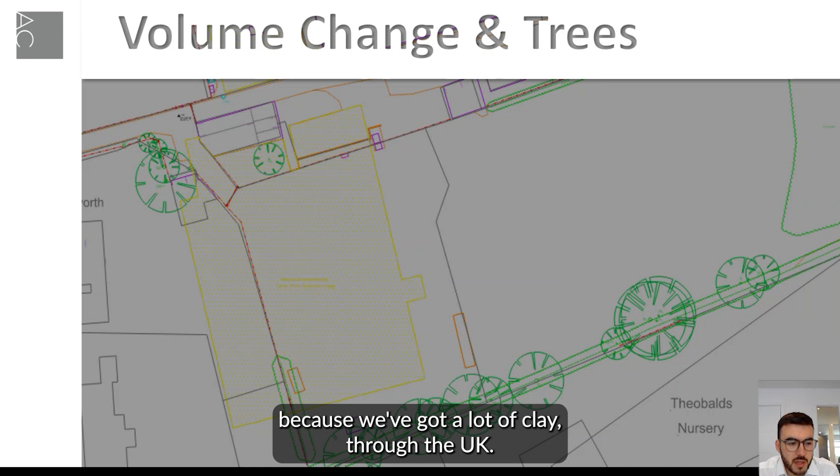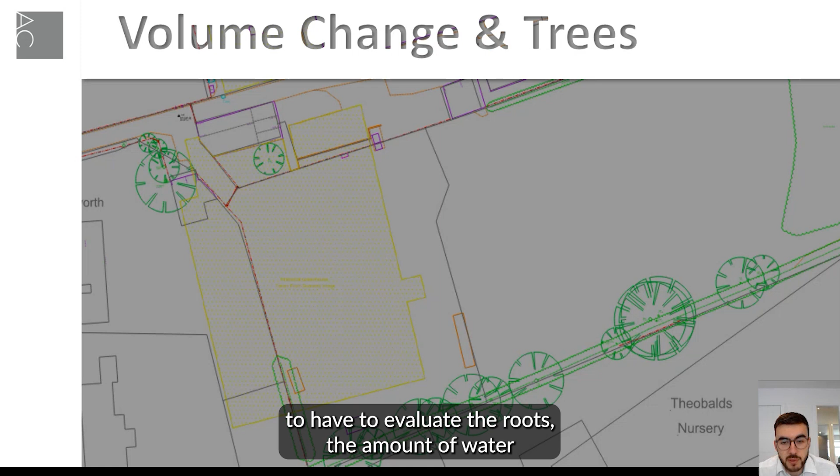Volume change in trees is probably the most common issue because we've got a lot of clay through the UK. Clays can vary in their volume change potential, but quite often if they're high, you're going to have to evaluate the roots, the amount of water near your site, and the potential for change in settlement. This is when you start to see cracking at lintels over time if you get this wrong.

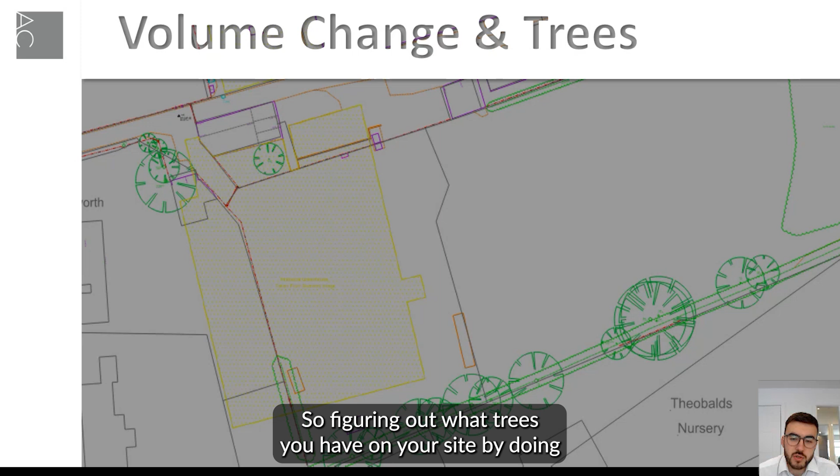Figuring out what trees you have on your site by doing topographical surveys first, getting the lay of the land, followed by tree surveys, will give you an idea of what you've got and how far away you want to be. If you've not set out your site and you have quite a lot of land to work with, we can advise you as to how far away you might want to be from a certain tree to avoid its influence.

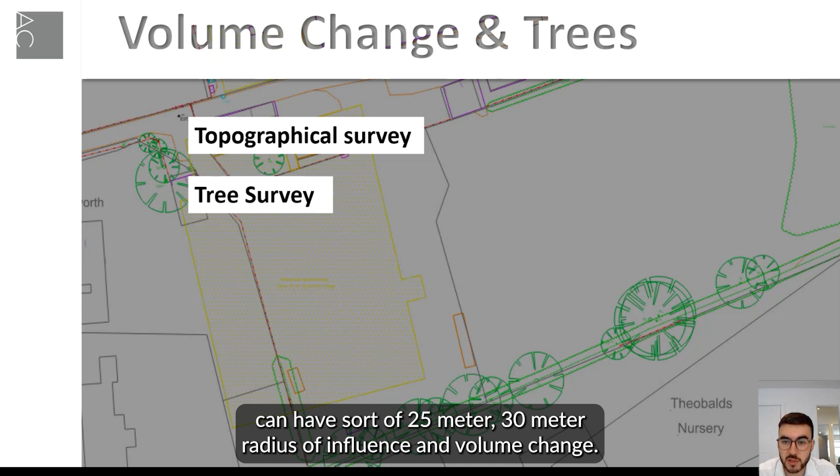They do range quite far. Some big trees can have a 25 to 30 metre radius of influence on volume change.

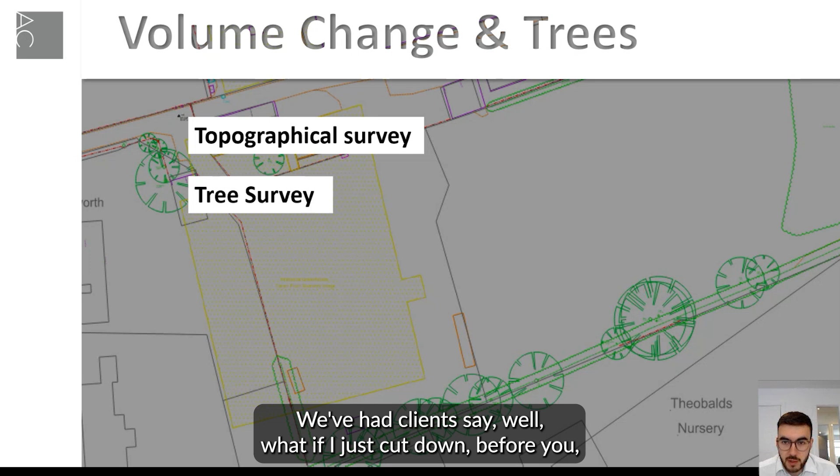These are not something you can skip around. We've had clients say, well, what if I just cut it down before you start works? Well, the roots can take up to 10 years to die off. So if you chop it down thinking you're saving yourself the hassle before getting us involved, I'd advise against that, because over the course of 5 to 10 years, you might find that it settles and cracks after that.

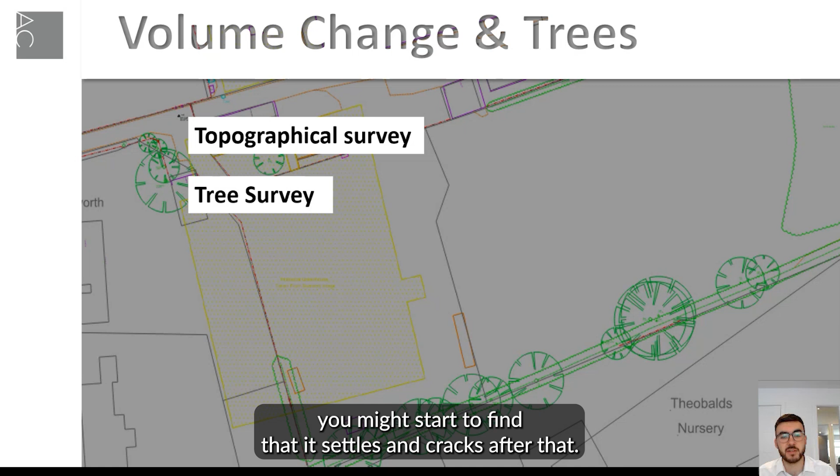So, site planning: figure out where your trees are and what you've got. If you've got big ones, whether you chop them down or not, they're still going to have an influence, that's fine, but you can plan ahead for it. You can say, okay, here are the options for the foundations we're going to go with.

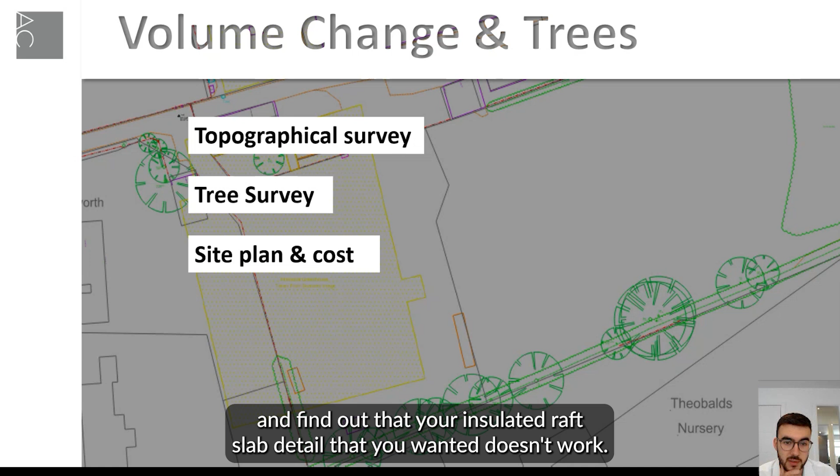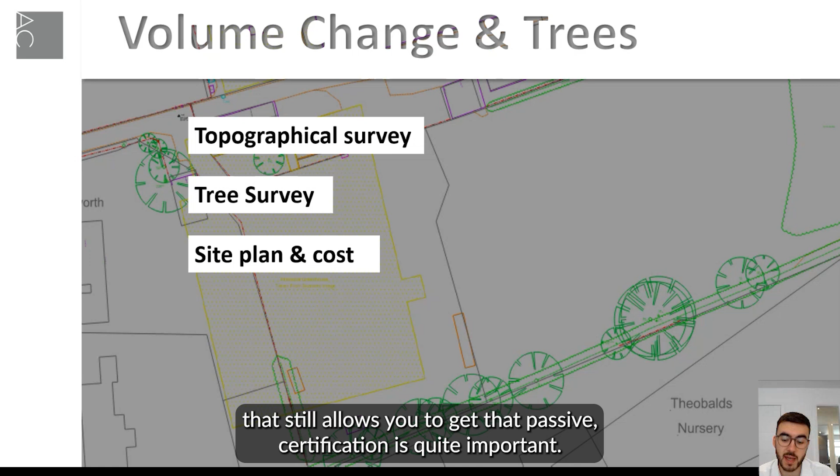If you're trying to go down the route of, say, a passive house or a passive principle designed house, this is important, because you don't want to leave this to the later end and find out that your insulated raft slab detail doesn't work. That could blow your passive certification out of the water straight away. So planning for that and setting it out on site in a way that still allows you to get that passive certification is quite important.

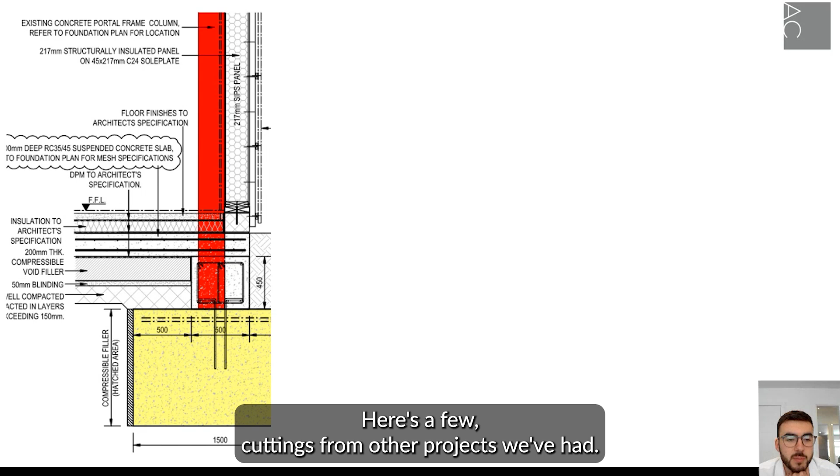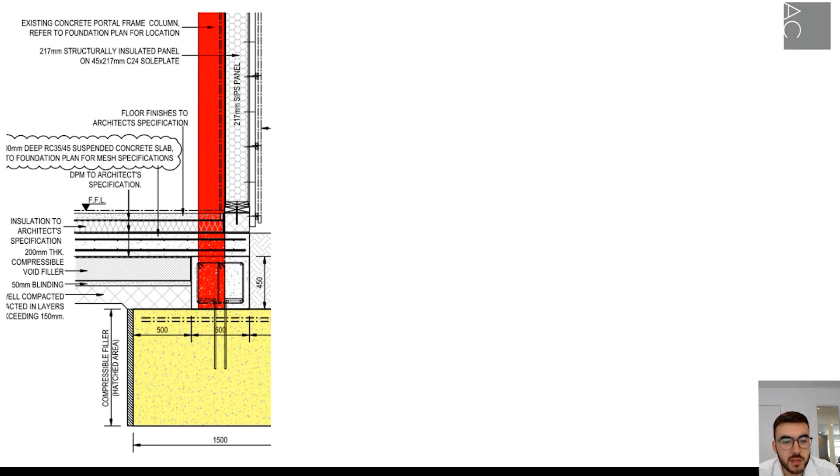Some of the options for this with high volume change, here's a few cuttings from other projects we've had. This is a suspended slab, suspended on a ring beam off pad foundations with a compressible void filler underneath. This allowed insulation above, a SIPs kit insulated above the slab, so a cold slab beneath, with a compressible filler underneath to take care of that volume change. This was a high volume change site.

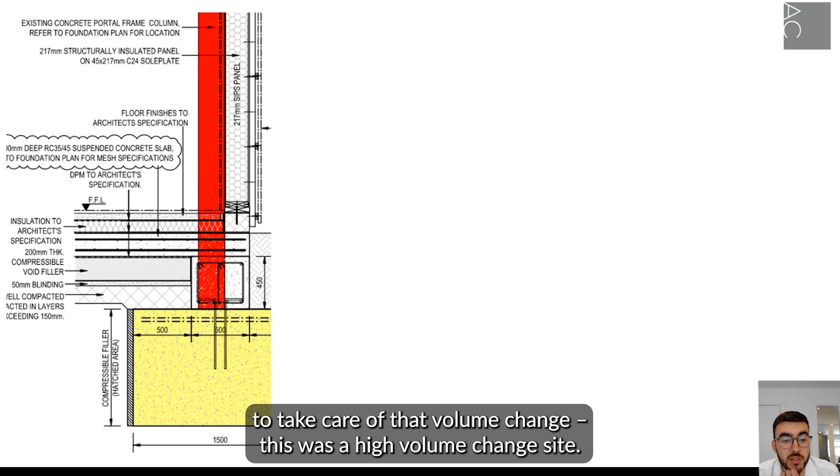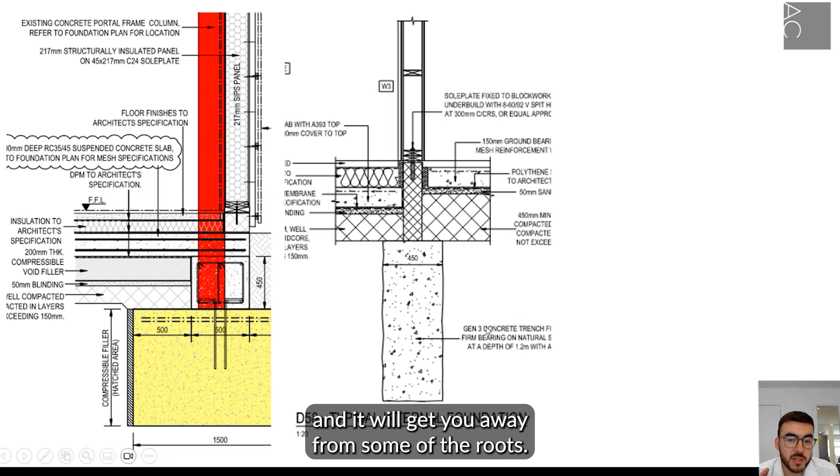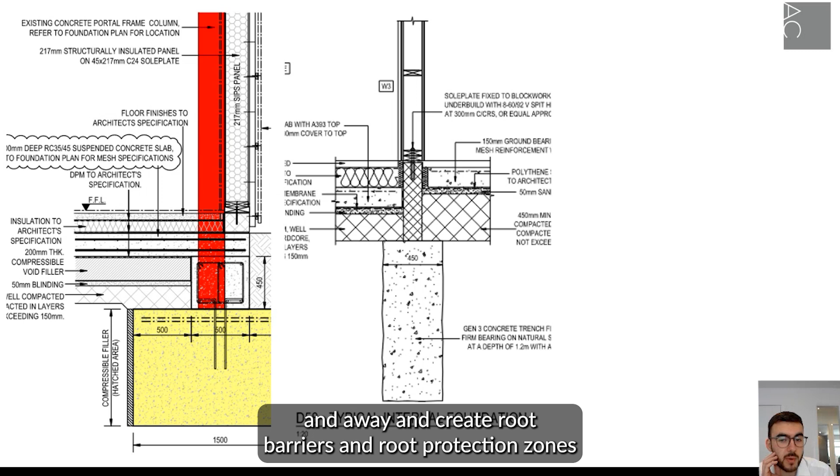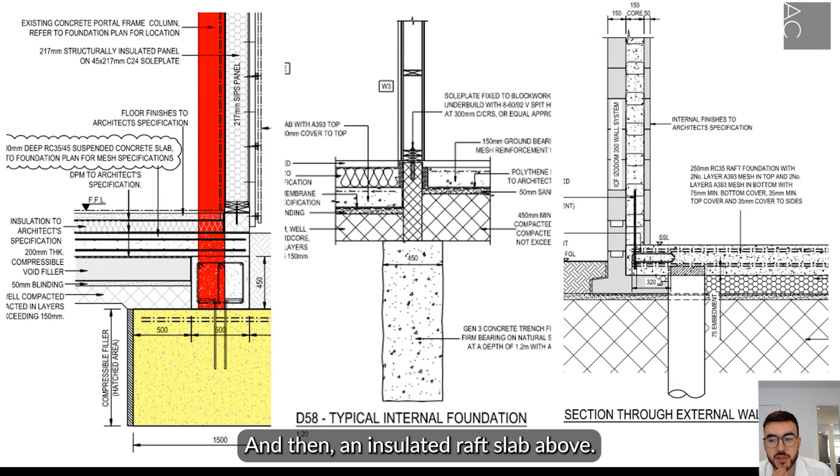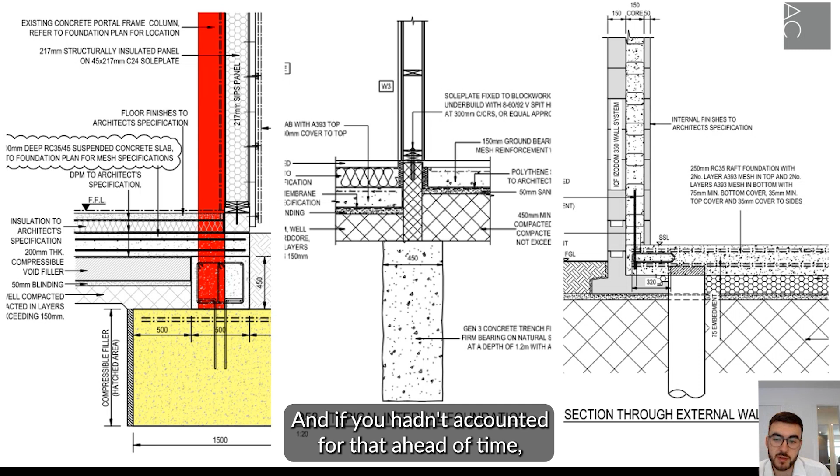Then, a more typical way to do this on a poorly graded site would be pile foundations with an insulated raft slab above. This is an example where you want a raft slab for thermal efficiency. However, you're going to have to break some thermal bridges where you're joining your pile foundations, which is not great for thermal efficiency. If you hadn't accounted for that ahead of time, it's going to come as a bit of a surprise. So you're going to want to know what that bearing strata is at the beginning.